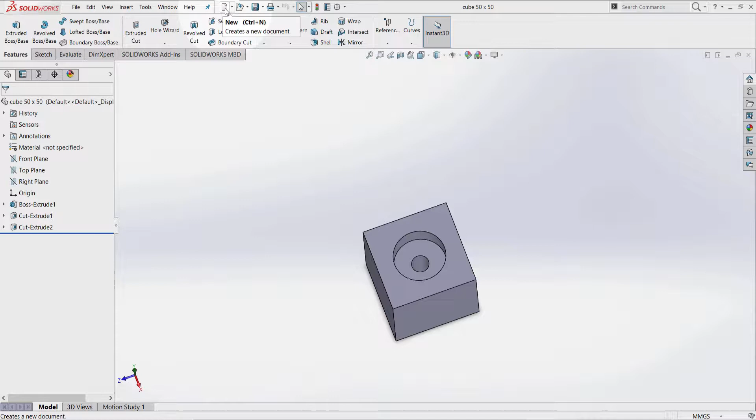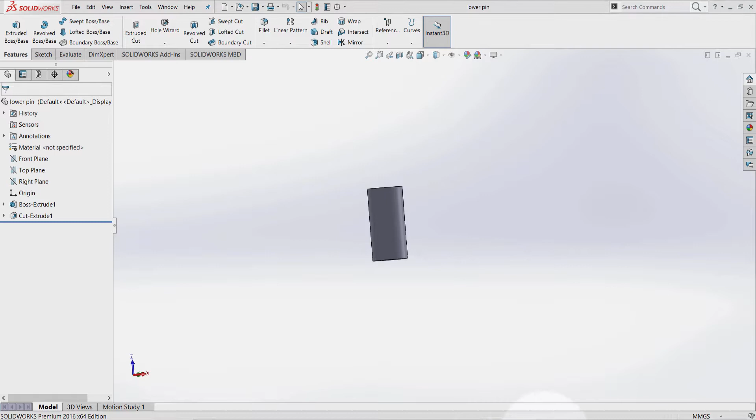So any open document in the background appears in this rectangle here. For example, if I open the rest of them, you'll notice that they appear here. So once you open all of your parts, any part running in the background is going to appear in this rectangular white background at the left hand side.

You can insert the parts by selecting them, left click, don't press anything, and just place them anywhere you want. Now be aware that if you put them just in a random place in the graphic area, they're not going to have any relation with anything.

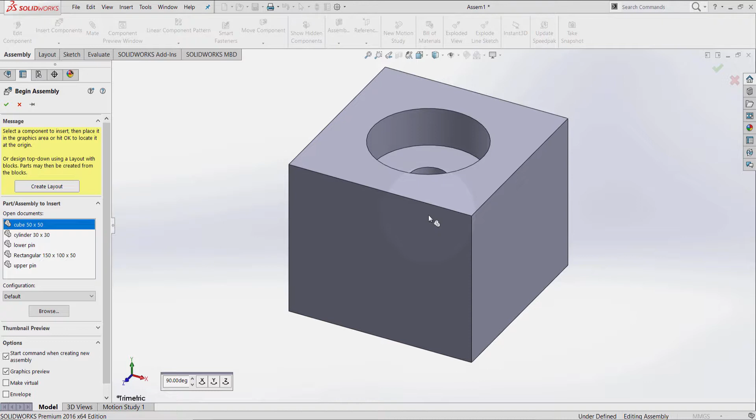So if this part is your base, for example, press Escape, insert components. My base here is this rectangular shape. If the part that you are using is going to be your base, you have to go here to Feature Manager, Design Tree,

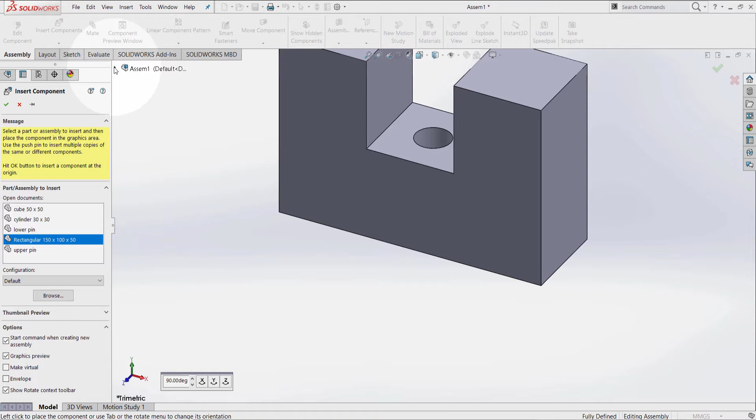expand this arrow and select Origin. So now this base is attached to the origin, exactly in the center of my graphic environment, and not just in a random place.

So in the next tutorial we're going to see how we can insert more parts and add relations. Thanks for watching, see you in the next tutorial.